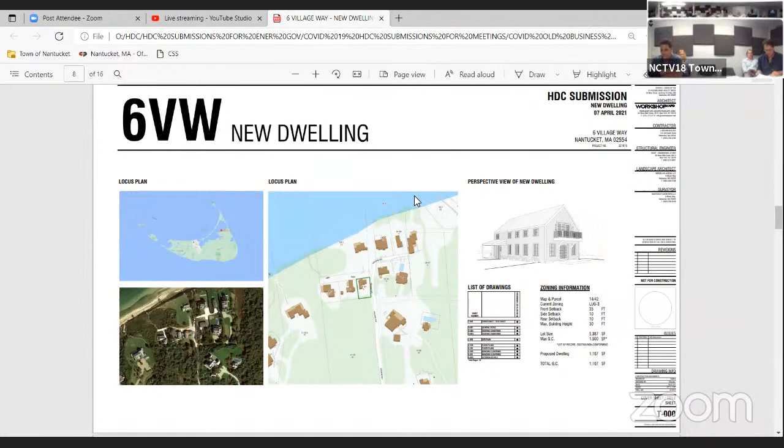Both the structure that was approved for demolition and the context that surrounds it. If you want to stay on that page, that's probably the most informative page to stay on. Just to refresh you all, this is a pre-existing non-conforming lot that has the ability to have up to 1,500 square feet of ground cover put onto it. We will need to go to the ZBA following HDC because it's a non-conforming condition. So the current structure on the site is approximately 1,200 square feet.

The proposed structure that we're putting on the site is virtually almost the same size, around 1,150 square feet. So as far as ground cover goes, we're not really changing the impact on the site very much, but we are pulling it back to the south so that it isn't as tight on the street as the current structure.

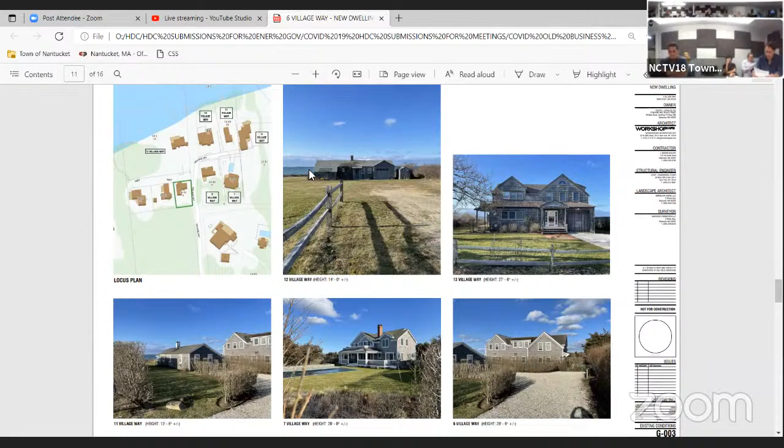When you go to the page with the site plan, you can see I've included the existing—next page, Ray, turn the other way, past the photos. You'll see how the current structure is only about 4 feet off the property line on the north side. The proposed structure, we're putting about 19 feet 7 inches back off the property line on the north, so we're trying to create a little more breathing room on the site.

Now, I've spent quite a bit of time studying the homes in this area. There's been a lot of demolition approved over the years, with some new houses built to the east of this, and some additions put on smaller cottages to the west of this.

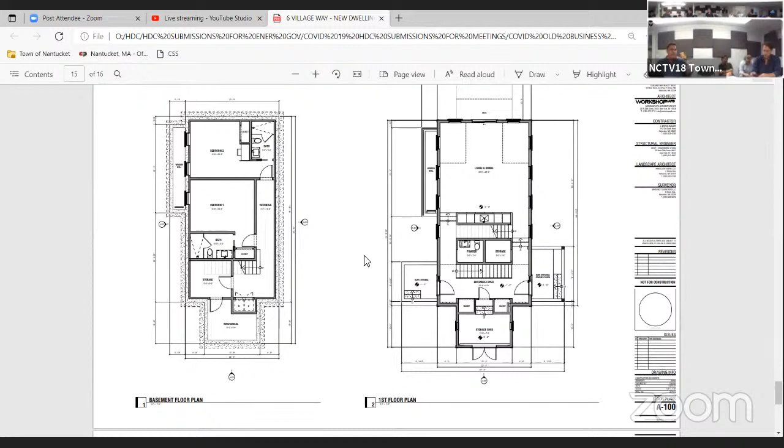Additionally, if you look at the existing photos of two of the more, I would say, older homes that still exist in the neighborhood, they're very simple boxes with long ridges on them. They're not broken up into a series of additive massing conditions. They're very just simple boxes.

So the approach we've taken is to do a simple box. It is a 1.5 story box to keep the ridge height down to 24 feet 10 inches. The ridge is about 44 feet long. And in addition to keep the height down, I've actually sunken the first floor plane down about 12 inches into the grade to minimize the vertical impact of the home. It's a gable forward elevation that would be partially visible from the water on the second floor.

I've tried to create more of almost a cottage look. It has a second floor deck cantilevering off of it that I think is quite simple and really somewhat appropriate for the area. Very simple rhythm of windows, nothing too drastic beyond the fact that it's a box.

I don't want to have dormers on it. I want the structure to be something that really almost looks like it was an old barn there that sort of got converted into a home, much like some of the smaller cottages that exist. I don't feel like one of the neighbors' houses next door, where they took a 1-story mass and stuck a huge 2-story mass on the back, is something that's really aesthetically appealing or something that suggests it would have been done back in the 40s or 50s when this area developed.

The trim on the project is gray, and that is what I have to say. Everything's gray — windows, doors, trim. Everything. Okay, great. Thank you.

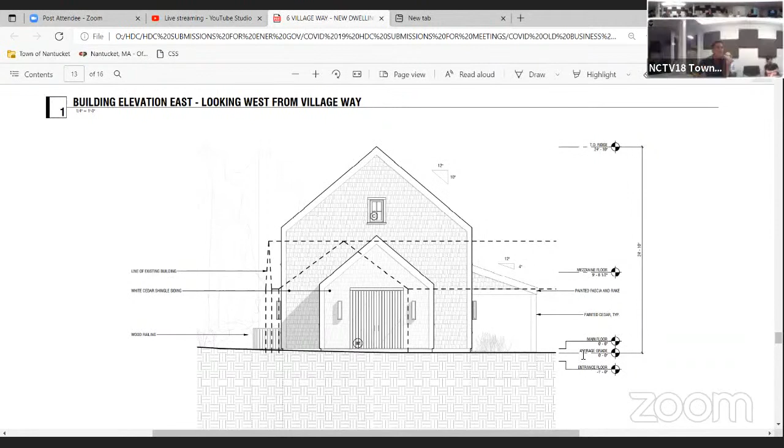Nothing. Nothing for the property? Landscape is nothing — it's going to be split rail fences and grass, that's it. There's nothing here. It's too small. I think she was talking about the building. Oh yeah, no, this is it, nothing else. Okay, I'm impressed, so that's all I got.

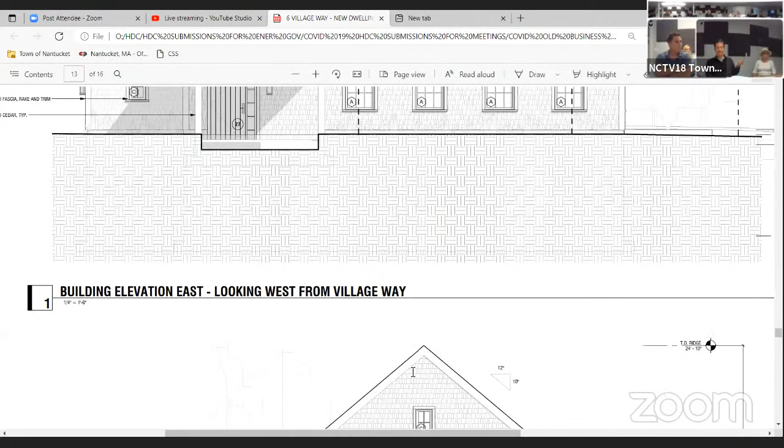Thank you. You want to go next? You want to go next, John? Abby's spoken. Yeah, go ahead, John. All right, my comments are that the changes are applicable to the area.

Okay, where is this, the front door? Which elevation are you looking at, John? No, the other side is the front door, but they're virtually the same — there are two entrances, one on the back, one on the front. That one's the front that has the porch on it.

There's not one double hung window in the whole project. That's right, John, there is not. It is very hard to use a modern glass, a 6-light or 9-light solid, without it being double hung. I think it makes a lot of difference to the neighborhood — it'll stand out. Maybe change it around for the area, go see what's there. I've been out there, so you ought to look into that. Okay, thank you, that it, John?

Thank you. How about you, Diane? I think that it is a good, simple building. What are the windows going to be if they're not double hung? Are they going to open, or what are they?

They will all be — I don't want to say all — a few of them will be awning windows that will open, as if it was a barn-like condition, tip out, not casement, tip out. The rest would be fixed, either fixed or tip out. We don't need to open all of them.

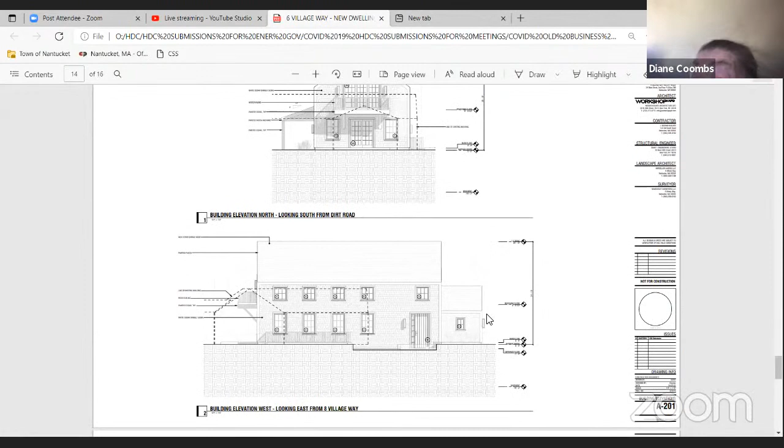Go on, Diane. I think in this particular location, they keep the front of the building simpler, and it's sort of tucked away. It is a different concept. I would try and see if anybody else is interested in keeping the windows as he designed them.

Oh okay, well it sounds like a lot of these windows are going to be fixed anyway. It'd be interesting to know which ones were. Thanks, Diane. Val? I do appreciate the simplicity. I went out there — there was just something about it that feels too big for this site.

I almost wish the smaller piece was on the corner as opposed to just the bigger facade with all that glass. Is there anything you can do to mitigate the impact of all those doors? There's like 5 doors on that side, right? I mean, I get why, but I didn't see anything similar to that.

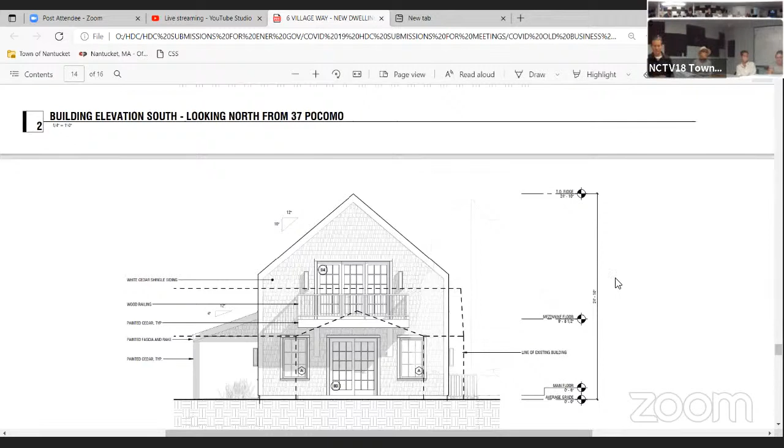South, yeah, north, the north. And it is a big roof right on the street.

Is that it? Okay, I appreciate the simplicity of the massing, definitely appreciate the gray trim. Because Andrew, you know I'm a little skeptical about that kind of rake that blends with the corner board thing. In gray, the building's extremely simple, so I'm willing to take a try on this one. So, to John's point, it'd be really nice to know which of these windows are operable.

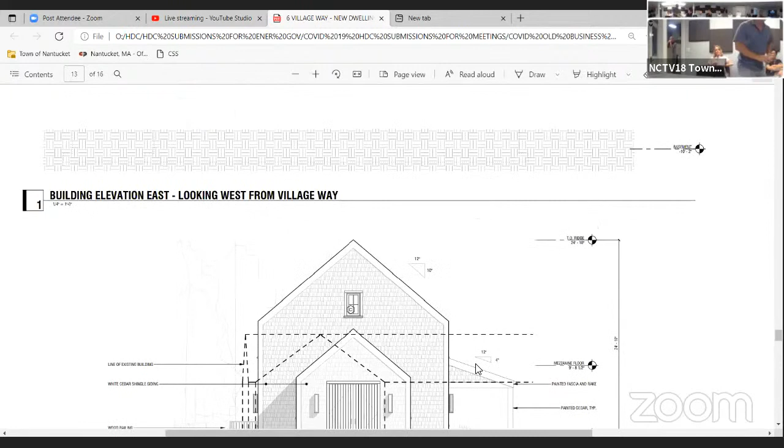Is that something you can identify? Yes, like every other one. There's no reason to make them all operable. They cost a lot more money, and ultimately a lot of people use air conditioning.

So these would be operable, and these would be fixed. That's it. But there's no visual difference in the unit, whether it's operable or not, except for the fact that when they're open, that's John's point, they're coming out off the face of the building.

Are these awnings then? They're all awnings. None of them would be casement, because that's not an appropriate look. Oh, I'm sorry, I misunderstood. So there's no casement windows, John. These are all awning windows, and half of them are fixed.

Okay, does somebody want to make a motion on this? We'll hold for revisions, motion. Really? Who's that? Well, what would he be revising?

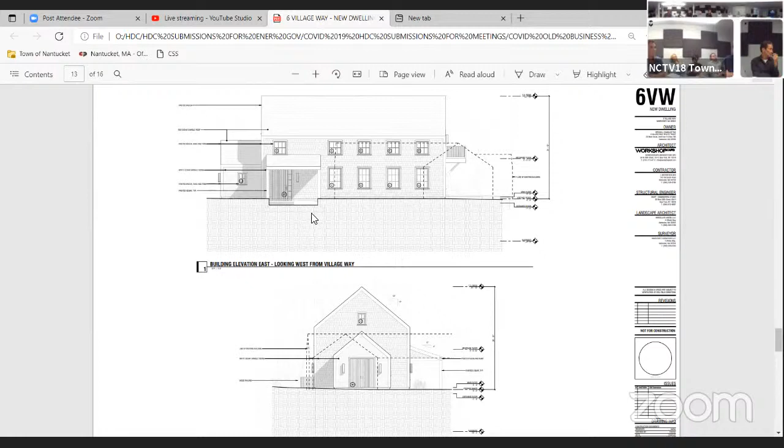Could staff just clarify the notes on the windows, what's operable? John has an issue with the windows. Val has an issue with the massing. Those seem to be it, and the glass thing, the amount of glass facing the corner.

Well, I'll add that above the second floor, in that area, everything is visible. Correct, everything on the first floor is totally visible too. All right, with those, we could make a motion for revisions, just those few revisions.

Yeah, see what we can do. Was that a motion for revisions, Abby? It was. Okay, on that motion... John? Well, no, I'm just thinking. John said aye. Diane? Oh, aye.

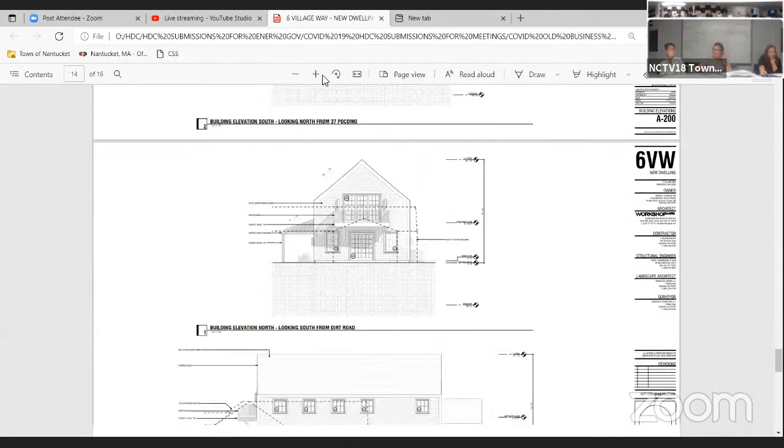I was gonna say, if it's something simple, like he could agree to diminish the glass on the south, make some of those windows instead of all doors, and make the windows facing the road double hung or look like double hung. What do you think, Andrew? Then you can get an approval. Yeah, we have to stop trying to...

So what if, rather than what I did on the second floor, I did a single door in the center with 2 large double hungs on the sides, and convert the other 2 on the ground floor to double hung. The north elevation would have a consistent look of double hung windows.

Let me make sure I understand. So on the second floor of the north elevation, we have 2 double hung windows and a single door? Is that what you're saying? Right, single door, 2 double hungs, and then 2 double hungs there. So the windows all tie in and you get a little more of this going on. Everybody understand?

Now, Diane can't see that image. So Diane, on the north elevation, what Andrew is proposing is that you have 1 French door in the middle, a single door flanked by 2 double hungs. And down on the first floor, you would have double hungs instead of the awning windows currently labeled as A windows. That's the proposal.

No double hung on the east side, no, because that's the most visible. I don't want to do that. Glass is light, how do you divide 9 light? You're gonna have 9 light and 6 over 6. I don't want to do that.

Okay, we have to get some kind of consensus here. Now, there was a motion to hold for revisions. That's on the table. I should be moving forward with that. Your motion still stands? It's standing by itself.

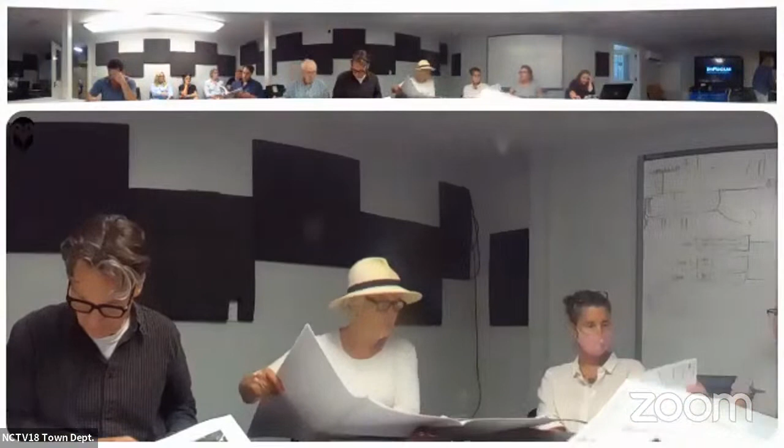I was thinking of proposing Tuesdays we get artichoke and black olive pizza delivered, so requisition part of our budget.

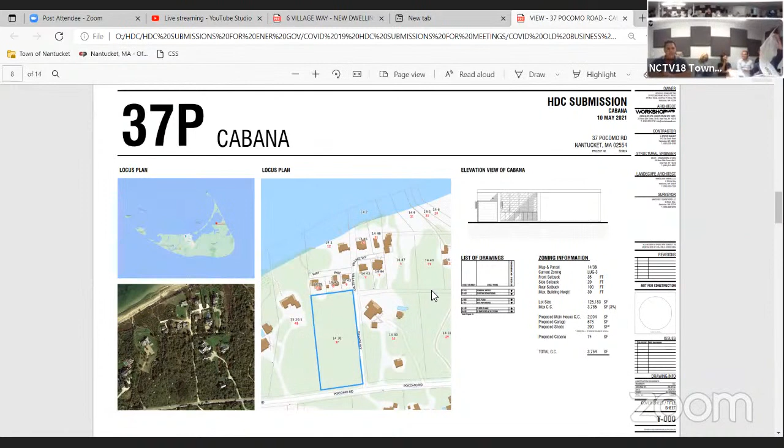So for the board, this is a house that was approved about 2 months ago as well. I believe Mirka was recently in front of you last week for the landscape plan here. And you had to take this fence down that was probably shown in our drawing, right here. So this is the cabana structure, which is essentially a large pergola that has an enclosed box in it with an outdoor shower and a powder room into it.

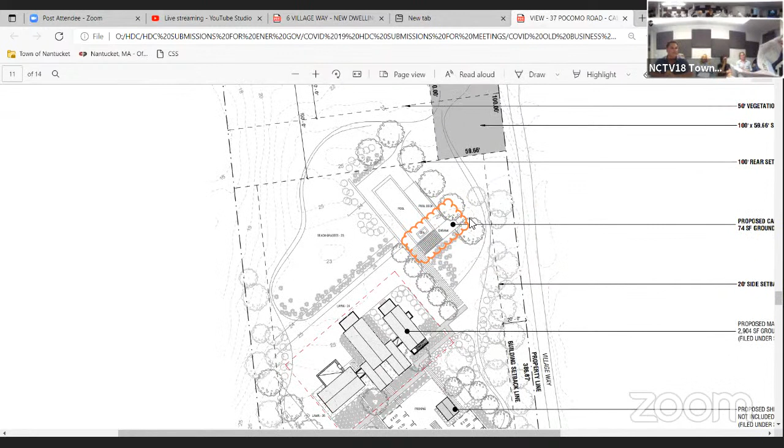And the intent is that it would be natural to weather on the outer frame of it, meaning the structure would be natural to weather, and the inset shiplap portions of it would be painted light gray. And we agreed when I was here with the house, based on vegetation and all the deals we brokered, that there will be no visibility of anything really on the ground floor of this property at all. So this will have zero visibility.

Because we're going to enclose this property very heavily with vegetation, as was discussed when you approved the house, and I believe was probably discussed with Mirka last week. So I don't believe there's any chance that any of this can be seen at all in any way.

And that is a masonry wall facing west, right? There is a masonry wall facing west, correct, which will have the same stone that was the pavers at the pool stacked up onto it.

All right, thanks. Who would care to begin on this one? I would. Oh, John? No, sir. What is this thing? These are lights. Yes, those are lights on the wall. What is on the outside material?

So that's white cedar. This is shiplap, John. Yeah, painted gray. The structure is all natural to the weather. The fencing is all natural to weather, all of this. And then the stone portion of it, I believe, was a granite, a medium gray granite. Because that's great too. Yeah.

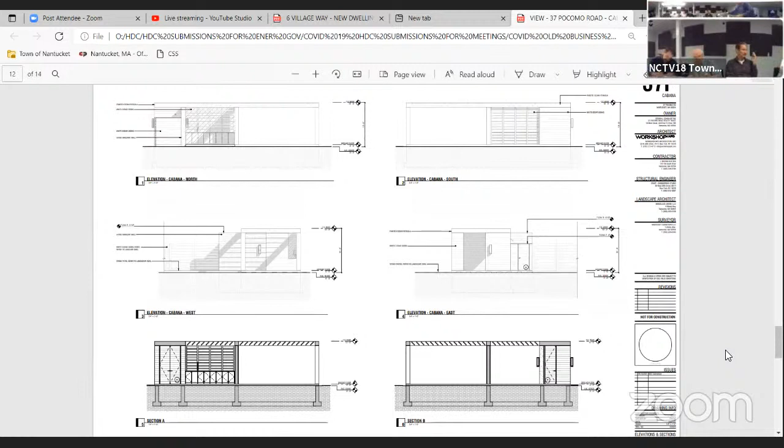Okay, sounds like we have liftoff. Can I have a motion? Motion to approve, subject to lack of visibility, not to be visible at time of inspection or thereafter. Okay, sounds good, that's Stephen's motion. On Stephen's motion: John, aye. Diane, aye. Abby, aye. Stephen, aye. Right, aye. Okay, there you go, and one more for you.

So this is another home in Canterbury Lane. Sorry. Oh, sorry, are you back? Yeah, okay.

This is another home in Canterbury Lane. This is the smallest of the homes that we've put in front of the board. This was the first house that was approved and built by my office in there about 2 years ago. It's quite simple, I think, a very Sconset-like structure. I'm sure the Sconset Advisory Board has comments that will trash it, but it's an asymmetrical gable, 2 stories on one side, 1 story on the other, 3 dormers, gable forward to the street. Again, it's already been approved and built there. So it's a fairly modest house for the size of the parcel compared to other homes that I've approved and others.

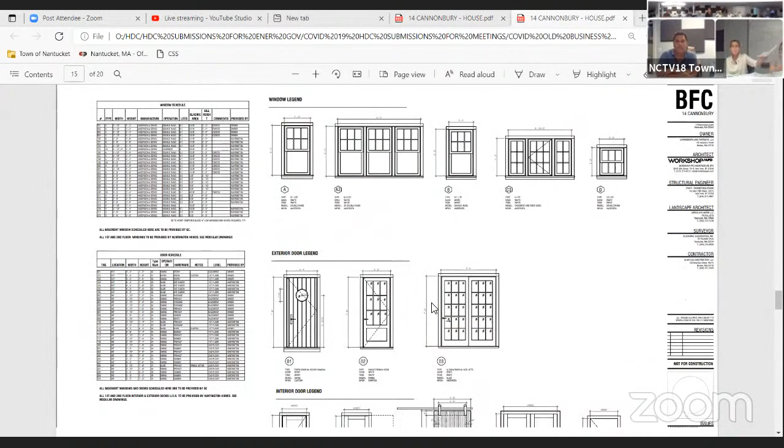You don't happen to have any photos of it, once you have? Yeah, is it built? Yeah, it's built. That would be helpful. You basically say that's it. Yeah, I believe I do, let me check. Maybe elevation, 1800.

That looks like natural weather to me. Oh, maybe it's natural, sorry. Okay, white trim.

No, there's 6 of them. I think this screen is dropped down a little bit or something. There's 6 of them, just like this, John. Yeah, the screen, it's 6 over 1 shot. Sorry, okay, so there it is.

You guys interested? That's what we're looking at now, with white trim. Anybody want - oh, Holly. Yes, Mr. Chair, Sconset Advisor took a look at this on May 17th. Very minor concerns - they actually recognized that this was a structure already done up there.

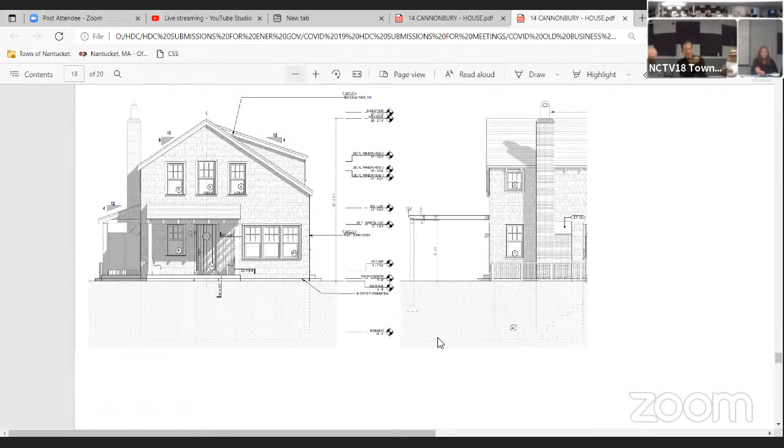Holly, north elevation, bring the shed roof down off the ridge. They're not on the ridge currently. Yeah, that's what they indicate. I see that - name, definitely not at least a foot down from the ridge there. I think, yes, make it lower off the ridge - lower than what's proposed is the suggestion.

And that would be the other tough one, because it's a 4 and 12 right now. Yeah, you'd have to drop the pitch to below 4 and 12. Thank you, Holly. Board members.

Except for the chimney being painted white, I think it's fine. Oh, good catch, yes, for sure.

How about you, John? Question - where the air conditioning? Are these air conditioners? You fell asleep. Andrew, are you drifting off over there? Me, no, I'm looking on the site plan if I can see where they are. Well, he's pointing to the north elevation - there's something silhouetted behind a porch that kind of looks like an air conditioning unit to me.

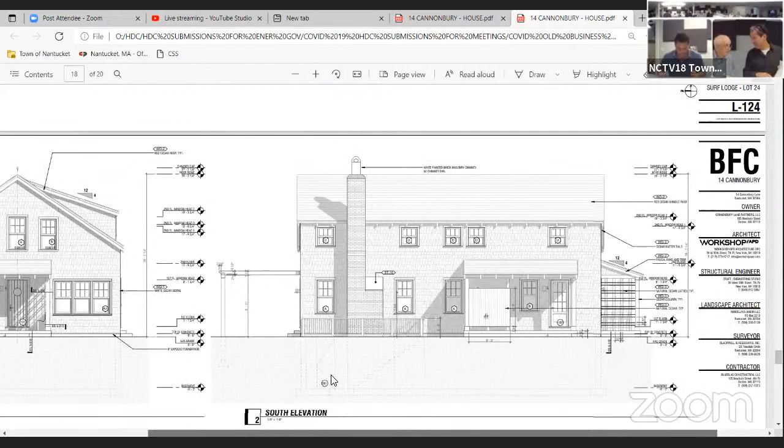No, it's a bench. Oh, it's a bench, not air conditioning. It's a bench. Okay, that's a bench. Yeah, I'm not putting an air conditioning bench. No, look, so you can see it on the north, on the east - do you know where the AC is going, or is that Mirka had it on the landscape plan? Yeah, put it on Mirka with the landscape.

Yeah, so we'll be looking at a landscape plan, but that is not the air conditioning, John. Okay? That's not being approved today. The air conditioning units are not being approved today, correct? Thank you, all right, good.

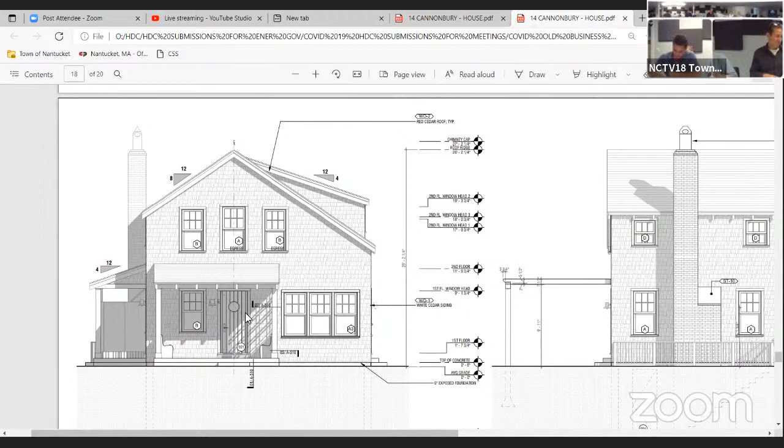Diane? I think that the dormers on either the east or the west - I've only got the front of the building up right now. I'd like to see the rest. The south elevation, those dormers perhaps could come in a small amount - there's a lot of cheek on either side. Diane? Yes. There are no dormers on the south elevation.

No, what is it? Is it the north elevation that's got the 3 dormers? Yeah, the north elevation has 3 dormers. Okay, but I would like - maybe, Diane - to bring them in a little bit. They have a lot of room in the dormers. Either that, or I don't know how you could make the windows bigger.

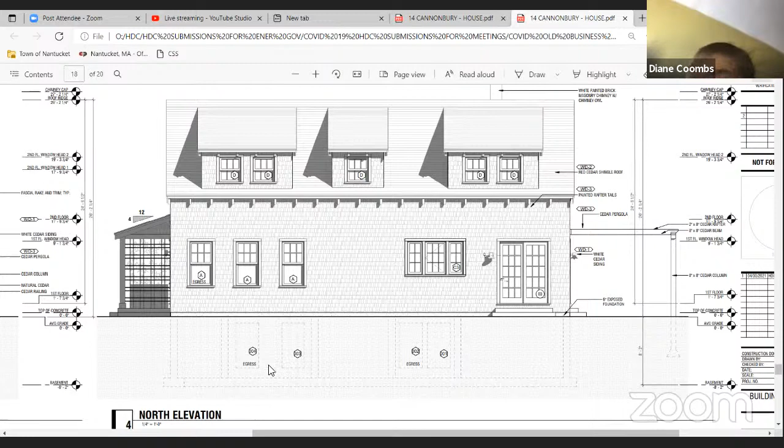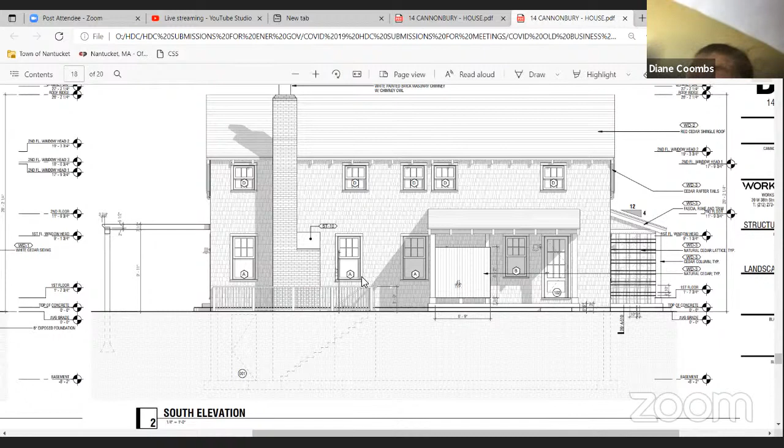I think on the second floor, second story, perhaps the south elevation, those small windows - the D windows - should be made bigger. Those windows right there in that elevation, I would like to see them a little bigger. The A's are a nice size, but those D's are little. I think I would like to see them made bigger, so to go up at least one more size.

That's true on all of that second floor - all of them are small, except that window they're saying the A should become a B on the east elevation. I think that is probably true - it would make more sense.

Okay, thanks Diane. Val, did I get your comment? It was about the white chimney color. Right, it's going already from built once, I mean.

Abby, I was wondering if the chimney couldn't be internalized. No, it's not a very big house, it takes up a lot of room. It just looks a little bit like an afterthought, but that looks a little Sconset-y too.

The quirkiness of it, that's what we try to do. I think it's stepped, totally appropriate. The chimney is brick, natural brick, intended? Okay, that will make it, I'm fine with it.

It's gonna go natural, just regular unpainted brick. I thought you were going white, but all right, fine. So I'm okay with this, with the chimney being natural as opposed to white.

Would somebody want to make a motion on this? I will. Okay, go ahead, John. I can't see any instance where the change would help it. So I would suggest it's approvable.

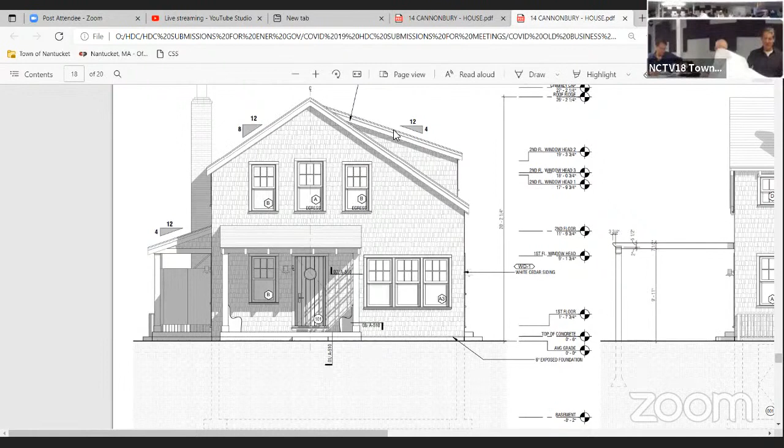There you go, Andrew, thank you. The next application is for a shed, a basic shed. Nice try, Andrew, this is somebody else. There's no shed on that side. Thank you all, delightful seeing you in person. Thanks for coming all the way up from South Carolina. I'm here now, I'm here for 2 months now. He's gotta live in his own house that he built, remember?

Okay, so now we're gonna do a Zoom performance, right, with your cut? Yep, it's Adam Davis from Goldsmith Architects here. Want to sit on this? I'm taking turns with you guys today. Carrie's gonna sit on this. Yeah, that's great. You guys are gonna get to take turns with me in a minute. Nobody wants that.

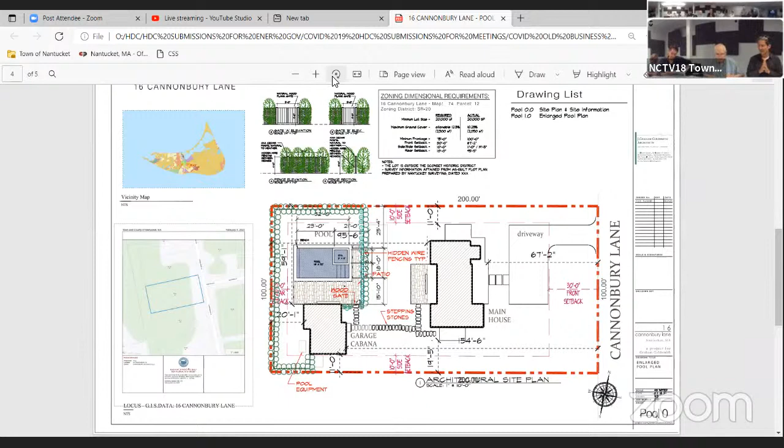Not a shed, okay, this is large. We're all looking at our drawings here, and Carrie's on your board, Val's stepping out for a second, the rest of the main regular board. Sorry, you wanna start?

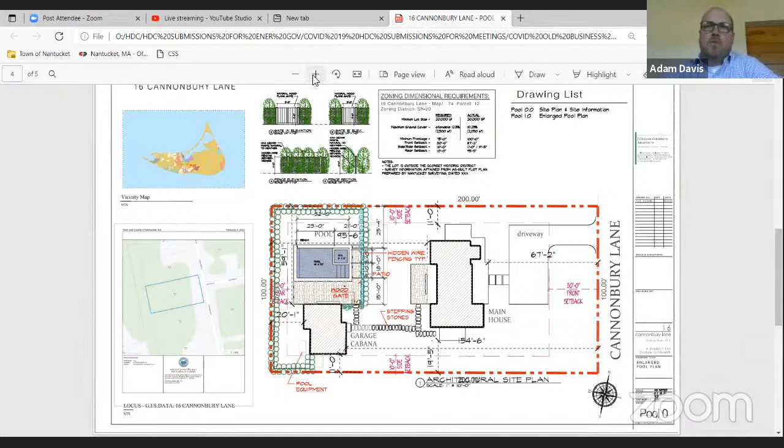Sure, so this is Adam Davis with Goldsmith Architects. This is a property right next to the one you just reviewed, and this is the house that was being moved from 9 Hawk Circle, the house and garage, which actually just arrived on site I believe on Monday. So this application is simply for a pool down on the western side, the backyard, with a bluestone patio surrounding it, and a small deer fence with privet hedge on both sides.

That's it? That's it, it's pretty straightforward, not a complete landscape. No Sconset on this, right? Sconset did review it on May 17th. They had no real concerns, only notated that the pool seemed close to the back property line. The back property line is public property, or it's that open space area back there. So it's a trust property which is likely to go to conservation. Yes, okay.

Anybody want to start on this one? I'll start. Thank you, Carrie. I appreciate that there's not a ton of hardscaping around it. I think it's consistent with the cottage, stepped away from the house and hidden by the house from the road. I think it's fine. Okay, thank you. Abby, you ready? Yeah, hold it up, I'm okay with that. Abby's fine. How about you, Diane?

You there, Diane? I'd like to see something else used than privet in the fencing, because the privet will be visible through it in the wintertime. I'd like to see more natural vegetation used, not quite such a formal square.

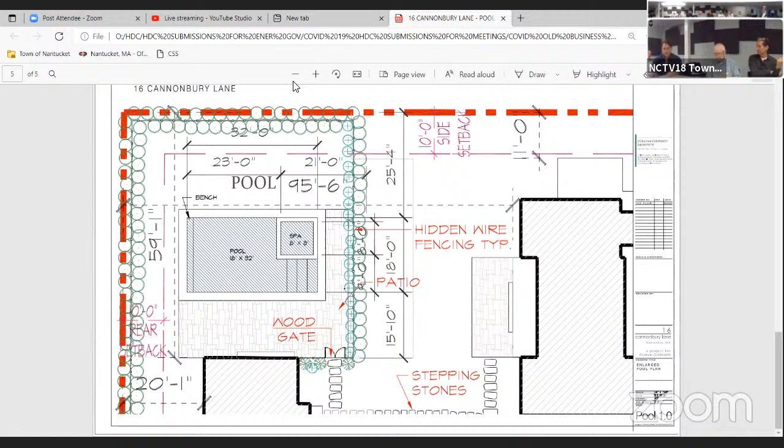Somebody like to make a motion on this? I would, oh John's gonna make a motion, to approve it. Just where is it located with the road? Oh, the road's over there. This here is, yeah, this is Cannonbury right here. Okay, got it. I'll make a motion.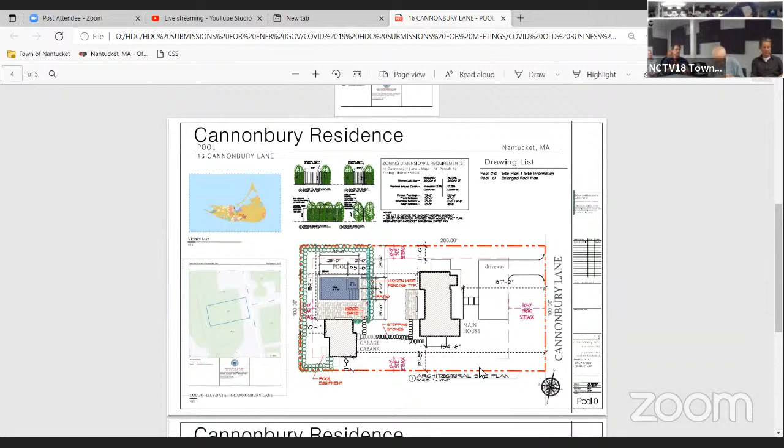Okay, to approve? John's made a motion to approve, folks. On that motion, Abby? Aye. Carrie? Aye. Thank you, Diane. John? Aye. In favor, motion carries, 4 in favor, 1 opposed. Thank you, Adam.

All right, thank you very much. Nice to see everybody. So we have Matt up at 28 Main, Sconset.

Yes, Mr. Chair, so this is the garage that you all approved. The concerns from Sconset, they took a look at it on May 17th. Cupola not in keeping with the neighborhood, top heavy and too large, unnecessary. Bracket details in the pergola over the side door seem heavy as well, but could work if incorporated in a more delicate design. Those are the comments, Mr. Chair. Okay, thanks.

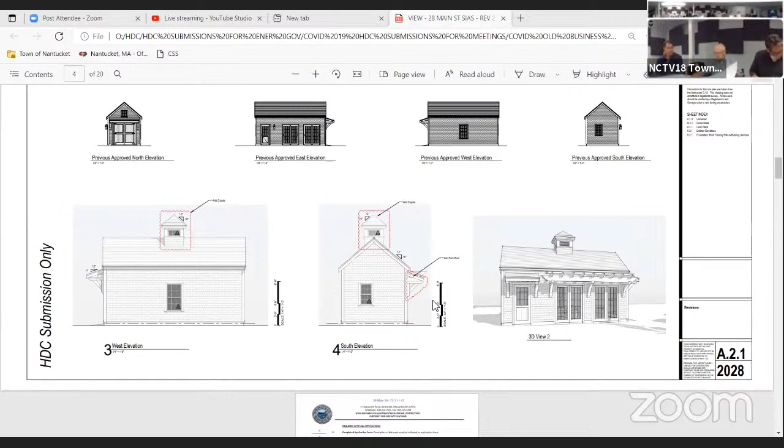Okay, so prefer natural pergola and no cupola. Abby? I like the previous, it's so simple. It's like such a simple barn, and now all the beams going across the pergola have detailed Chinese-style joinery, or whatever it's called. I like the simpler version. No to the cupola, I think it's just too much.

Thank you. Diane? I would like to see the brackets holding up the pergola a little less bulky. They seem to be very wide to carry that pergola up on top. I'd like to see them perhaps less deep, whatever. It looks like the ones on the east elevation come down longer than the one on the right for the little roof.

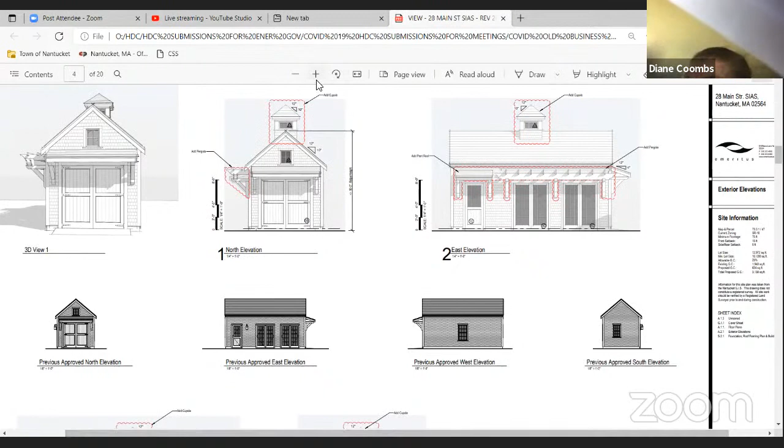And the cupola, I don't know what you've decided. I think it's not appropriate with the building.

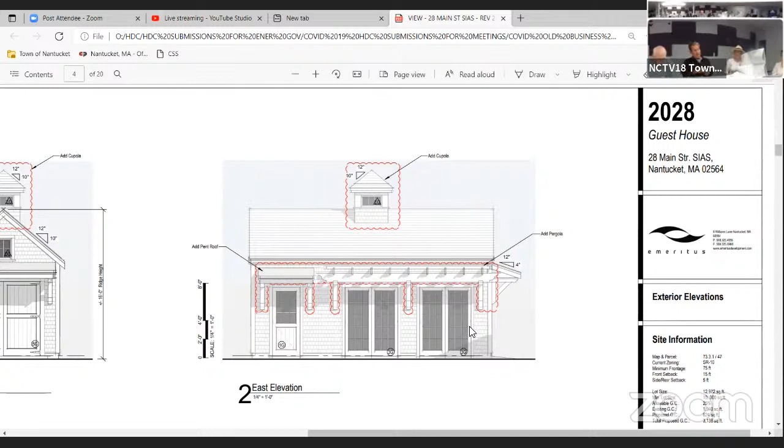Okay, thanks, Diane. John? The comment on this, the visibility, from what I can see, outside of the property in the back, the little shed, the only thing that would be visible, possibly, is the cupola.

Cupola should disappear, not break to reflect, take a hike. Take a hike. Okay, take a hike, that's right, taking a hike. Also the door, if it is visible.

Actually, South elevation. John, I don't think that he's proposing changing the door, right? Probably down here, the little drawings are what was approved. Okay, so thank you, John.

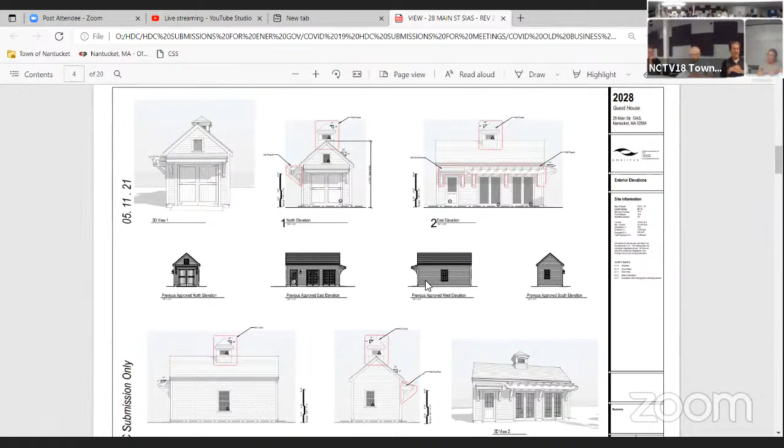The cupola is not getting a lot of favor. So I also believe that the pergola, because of its size, is very small, but the members are very large. It's kind of like if this were twice as big, three times as big, it would be successful, but the fact that it's so small makes those pieces feel really large, so I'd like to see all that stuff scaled down and simplified.

Could I shrink it to like 4x4 stock as opposed to the 6x6? Yeah, that would be, well, you get my vote on that. And natural to weather.

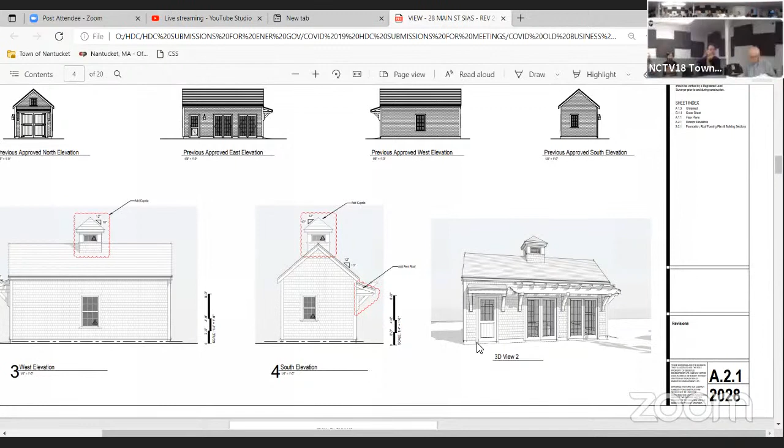It is, it's not, yeah, I don't think we specified, but if we could just... I think we could do more staff with this, the cupola and smaller members for the pergola. Just leave it alone. I'd actually like to see that beam go away. I think that you could make that steel and box it in. This could just be half the size, and that could just be boxed in wood.

It's very ornamental, the beam, that's holding up the rafters.

The biggest concern I have is not necessarily the two-dimensional aspect, but if you look at the north elevation, that's a buildup. That buildup is for such a small pergola, the depth of it. If this were 8 to 9 feet deep, I think it would be more relatable.

I still think it would be too ornamental for this structure. But I think you could have that element if you were to downsize it. One way you might do that is to use steel and box it. I bet you could go to a 4x6.

Yeah, now that I'm looking at it, it's such a light structure, I could go to a 4x6. Yeah, 4x6 beam. Does somebody want to try a motion on this?

Steve, make the motion. Well, you've got Steve's not... actually on. Yes, I am. All right. No, I thought Val was taking turns. No, well, so Val is, you're next. Oh, I misunderstood, she comes back every other one. Triangulated, that's the way it's happening right now. Strike my comments from the record. Well, I think they were good comments.

You want to give it a try? You want me to say what it's gonna be? No cupola, through staff. And the brackets would go to 4x4s, and the carrying beam would go to a 4x6, natural to weather, on the pergola piece.

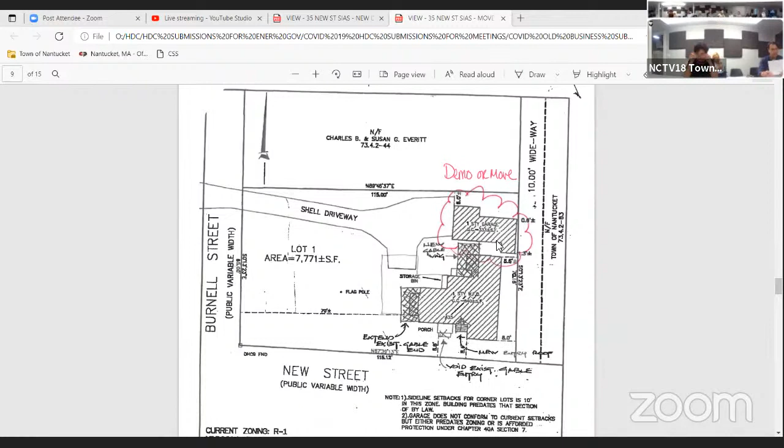Hello, Lisa. Oh, hi, Diane. So this, I don't know if this is the demo/move. It's an existing building on the corner of Burnell Street and New Street. It's a small one-story cottage that I believe Chris Holland actually built in 2004. So that's the first part of the application. The second part is basically to replicate the building in a slightly larger scale, but a very similar design.

So our first thing is move off or demo the building. Shall we do that first? Yes.

Okay, so you've just explained it, Abby. I think I'm fine with it. Okay, Madam Chair, just for the record, Sconset Advisory did take a look at it on May 17th. They had no concerns. All right, thank you.

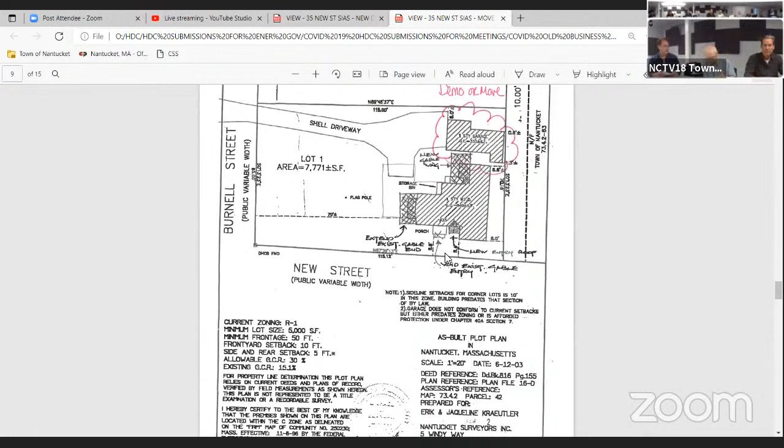So if I could get a motion to demo or remove. Madam Chair, I know you didn't forget about me. No, I thought I got Johnny, Val, Abby, Carrie, and me. That's 5. No, no, no, Carrie, Carrie. Even, I really want you on that. That's not 5. Carrie's not on it. Oh, Steve is on. Steve, it doesn't say on mine, so I thought she was on it.

Steve, what is your view? I'm fine with it, emphasis on the move, but I'm fine with it. All right, so could I get a motion to move or demo, please? No, Tina Hoskins? Motion to approve. Thank you, move to demo, all righty.

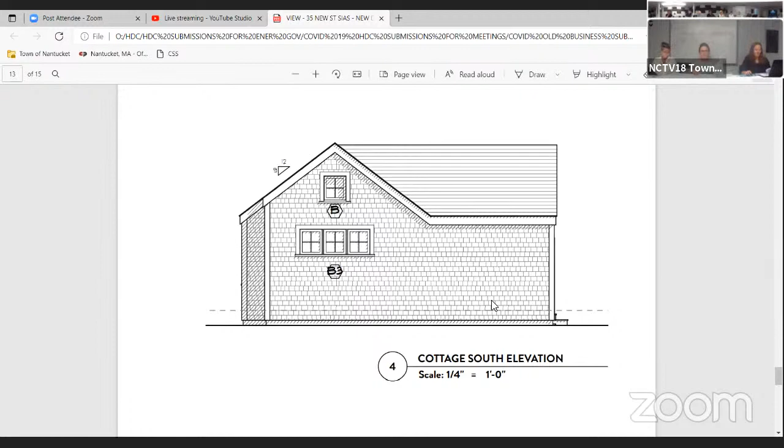Madam Chair, Sconset Advisory did take a look at it. They had no really substantive comments on it. There was just one notation about the south elevation, where there's a lack of fenestration on the right-hand side, but it reads as a shed and is reminiscent of the previous structure that was once there. So that was good. We did have a comment about photos of the street that weren't included in the application. Other than that, no comments, Madam Chair.

Oh, I think that photo was to show the hedges.

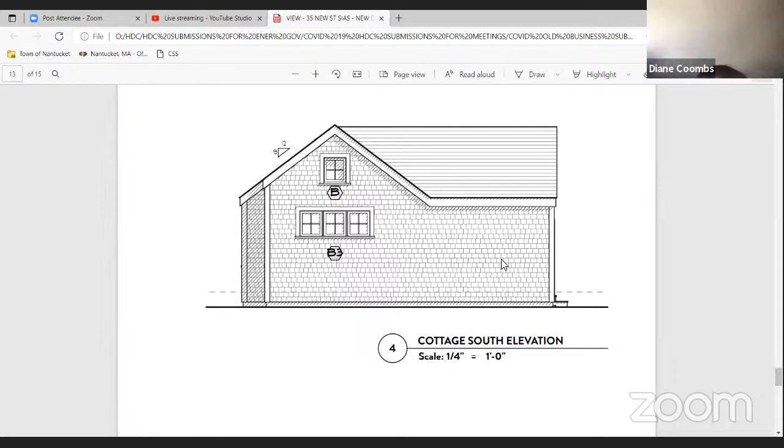Stephen, I think Carrie's on this one. I'm fine with it if I'm on it. I said it's a charming structure, Madam Chair.

Thank you. Johnny, north elevation, south elevation, and east elevation - 1, 2, 3, 4, 5, 6. There's 6.

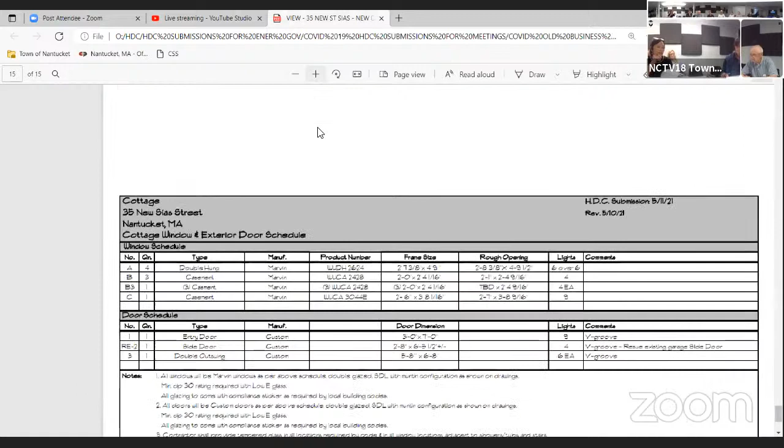They're listed as casements. They can become awnings. Do they flip out, or what do they do? Some would be fixed, but if you prefer, they could become awnings where they pop out. They're in the visible area, that's what I was trying to say, and they're highly visible. The other one here, C, on the north elevation, is a C window.

And what does that do? That one would end up being fixed - couldn't it match all the other double hungs? Because there's a sink in front of it, a vanity. The window needs to be shorter.

That was the reason. Are those casements like on the oldest house here? This one is visible, but I could make it a fixed unit. It should be made a double hung to match the others - it looks odd in there. So it would have to be a 3/6 double hung.

John, it would have to be a 3/6 weighted double hung if it were changed, which is fine. I'm okay with that - that was my question, could it convert to match the rest of them? You can't match them exactly, but it could become a 3 lights over 6 light double hung, a weighted double hung. Do you guys know what I'm talking about? Yeah, it's like a cottage window. They're not even, but that's fine. That was just my question on it - it looks odd compared to the rest of them.

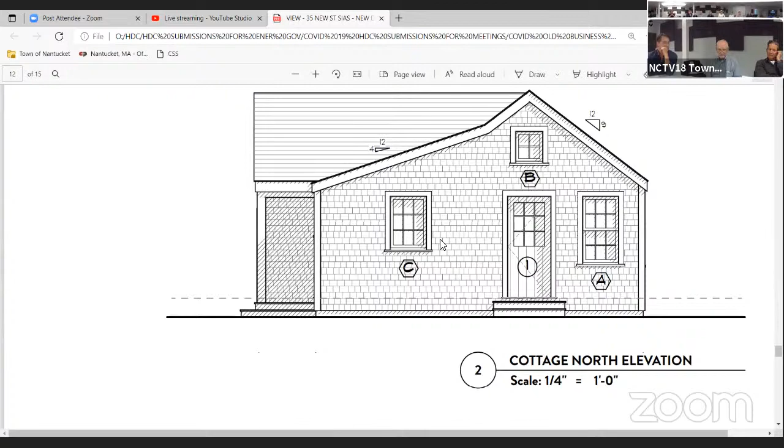Is that the side we're going to see? Well, it's in the driveway. Oh yeah, so I'm happy.

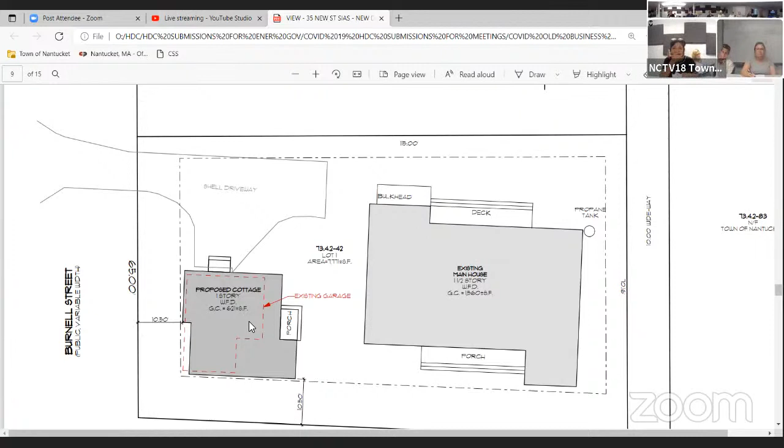What do we want to do - hold it for revisions on the windows? No, get rid of it. Through staff, what would you like the motion to be? I would like to make a motion to approve, making the C window on the north elevation a 3/6 - is it 3/6? Yes, 3/6 working window.

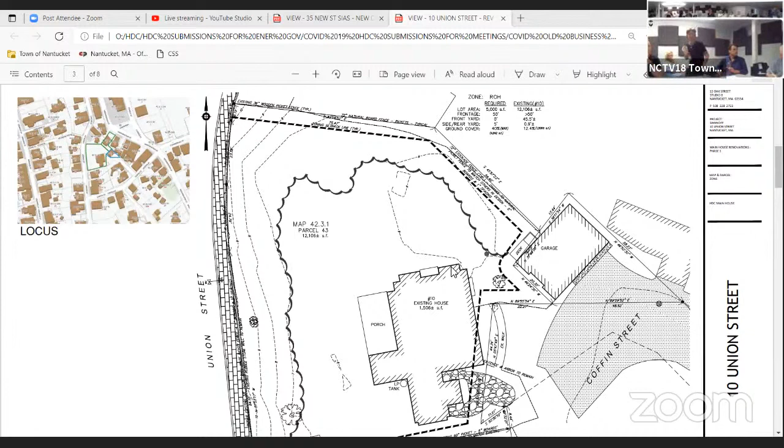And before you flip through the pages, I just want to say - I'll come back if I get there - I've revised what you're looking at based on HSAB's comments, so what you're looking at will be revised. I have some revised drawings with me that I thought might help. Okay, what we're looking at here is pre-HSAB or post-HSAB? Pre-HSAB. Pre, okay, all right.

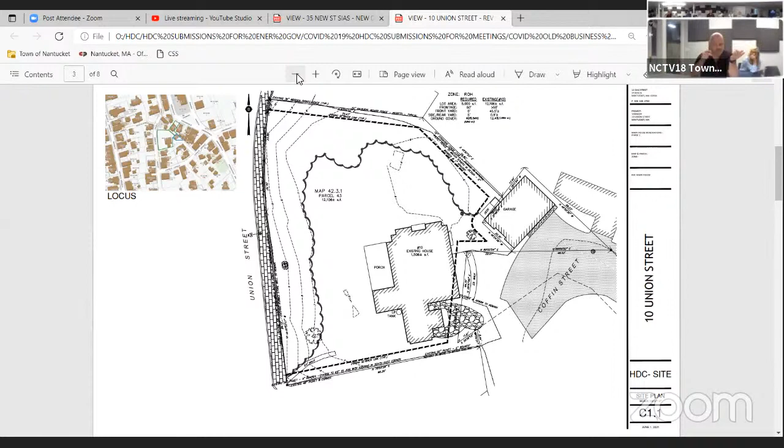So, is there anything you want to say about it? Yeah, there is. This is a proposal to add some French doors in place of some casements on the side yard on the north elevation. On the north elevation flanking the chimney are two existing bays that have 3 casements in them, bottom left. Got it. And we proposed originally to put French doors there to match the French doors on the east elevation.

And so HSAB, there was some discussion about - by the way, those bays are not original, the building's from the 1920s, those bays were added. I think Angus remembered working on them, actually, Design Associates. So they're not original to the house, but the proportions of those casements were talked about, and one of the suggestions that gained some traction was to take the proportions of the casements and turn them into French doors with a panel below.

So I did make that change. I'm not expecting this to get approved at the table, but we went ahead and changed the other French door that was kind of a typical 15-light door, which really didn't have the character that this building warranted. So the proposal would be to make all the doors match, using the proportions of those casements as the inspiration for it.

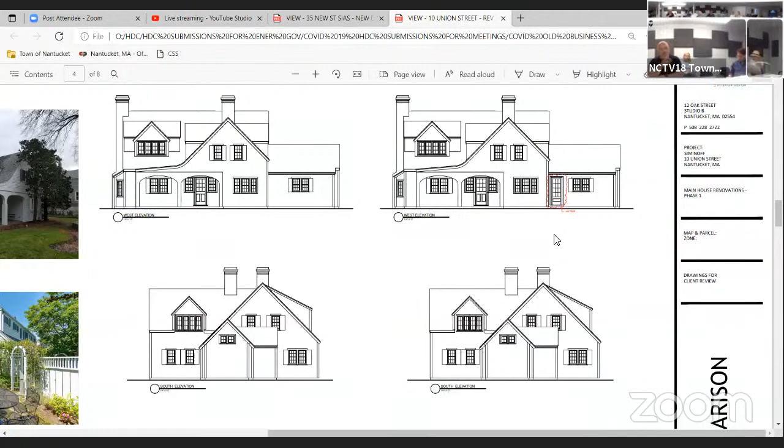You can pass an extra one there if you want to pass it to Val. So, sorry, did you just say you were going to reuse those windows on either side of the chimney? No, we redesigned the French doors we had proposed based on the proportions of those casements, and I just provided a drawing of what - okay, so that's in response to HSAB.

Thank you, Joe. Just - yes, we know what HSAB is going to say, but let's just say it. Yes, so you've all seen this structure before, 1920s, 1930s, and you looked at it on Monday. The small sheds on either side of the fireplace read as bays, and having French doors in a bay is awkward. Perhaps 3 narrow doors with a lower panel to give the appearance of tall casements, and then an option to recess the French doors in the existing bays.

With still glass at top and a panel below was the comment. I did also mention that this elevation is possibly visible from Union Street. Definitely, especially in the current condition, but Joe mentioned there'll be a landscaping plan coming in at some point. I actually like it open. Somebody was grousing to me about losing all the landscape, but now we get to see what a great house that is. Oh yeah, that's why they bought the property. Oh, so Max doesn't have it anymore? No, okay. A new owner, and they had another small house in town which they sold, so it'll be their family house. A great house, fabulous house.

Okay folks, well, I liked what HSAB had to say and wanted to take the initiative to draw it and actually change the standard 15-light door that was already there in response to their comments. The one comment about the recess, which Angus mentioned at the beginning of the meeting, was that because it's a bay, it feels a little weird with French doors, but then they said if those doors were long and skinny, they could all open, and that would be fine with them. Angus thought one option was to push the doors back so they're at the same plane as the gable, turning those little spaces into mini porches.

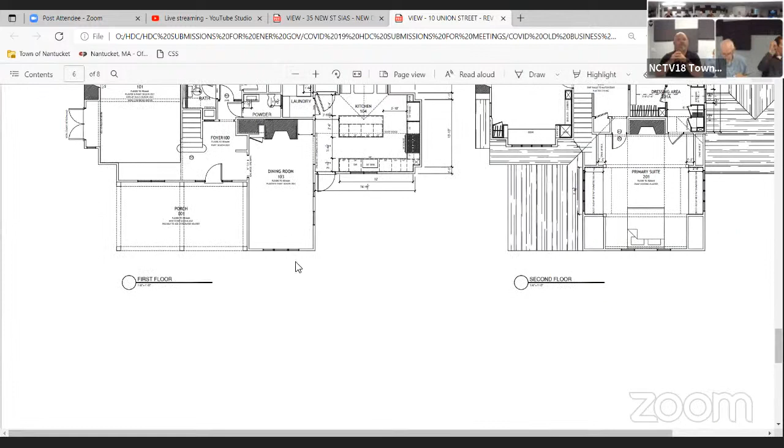Well, you want to start, Abby? Yeah, I think it should stay the same. I think it's charming with the windows there with the shutters on either side of the fireplace with the little bays. I think it's charming the way it is.

Well, I don't disagree with that. But the shutters don't really work proportionally, because there's only 2 shutters, but 3 windows. Val?

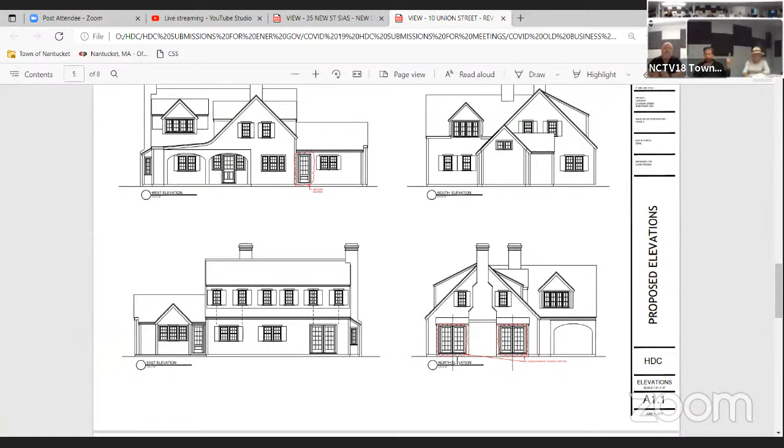I like the proposal that he's giving us today to make them all match, in terms of pane size. I'm still uncertain about the north. I'm pondering it.

Okay, you want me to come back? Sure. All right, Diane? I like the narrower windows by the chimney. The shutters don't follow unless they're fold-over shutters on both the east and west elevation. You've got mulled windows with only shutters at either end. They perhaps should take them off, or make them the double shutter that unhinges. But other than that, I wouldn't do anything else to it.

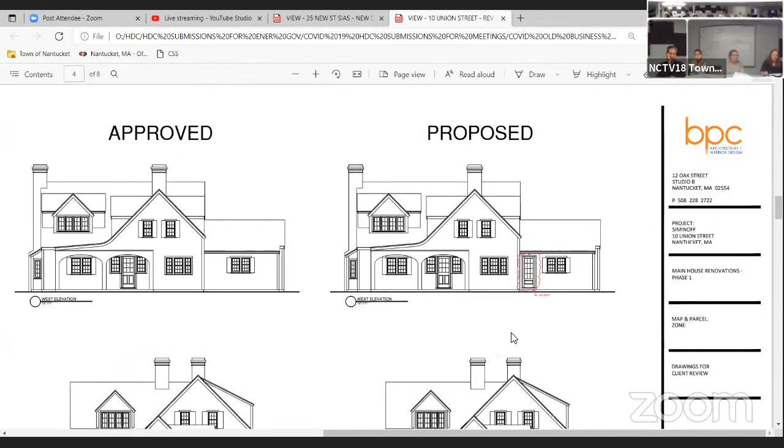The shutters are existing. Change is what you see here on the north elevation. Yep, and then you see here on the west elevation. Those are the only proposed changes, making that a 12 light door. I guess three times 4 would be 12. So I'm fine with that.

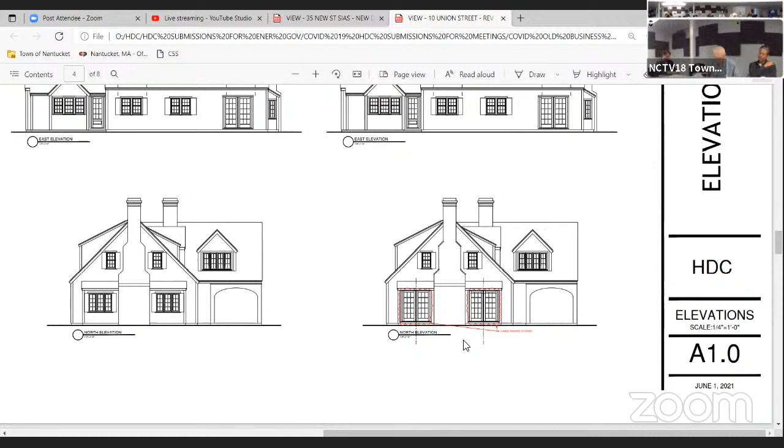Okay, thank you, Diane. John? East elevation, no changes to these. Well, I'm looking at the French door down there, multi-pane door. I can't see if it's existing or not. It is, all of that's existing, no change there.

So John, the only thing they're changing is right now, see these windows? He wants to put French doors in. That's what he's asking, right, he's having the one up here. Yes. And frankly, I really don't want to get an approval for what I submitted, but what I redrew in response to HSAB, I like better. I'm sorry to say that.

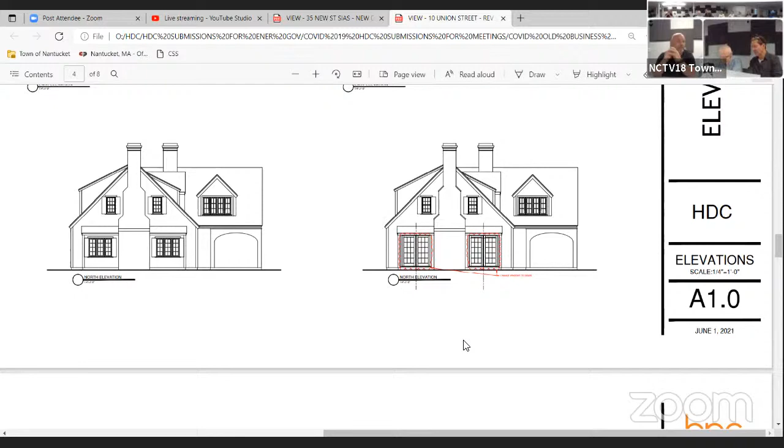He's putting panels underneath this, making 3 doors instead of 2, and he's putting panels underneath. That's to make them look more like the existing windows. Okay, thank you, I think it's approvable. I actually think it's really handsome, I should say the revised version, and I'm okay with changing that additional door.

So, oh, and then Val, you hadn't quite finished. No, I'm okay with it because I do believe they're gonna screen it like it used to be. So I'm gonna call this Exhibit A, the revised post-HSAB drawing. Okay, that's good, Diane. Yes, this is Exhibit A.

Are you making a motion? I will. Motion to approve through staff per Exhibit A. And Diane, I'm not sure that you're privy to Exhibit A, but that was Joe's - he changed the double doors to triple thinner doors with a kick panel on the bottom to make it more like the windows. That's what that looks like. So that was Val's motion.

On the motion, Abby? Aye. Diane? Aye. Thank you. John? Yeah, I have a question here. Before you move to motion. Well, I did already. I'm looking ahead at this window here, it's like, yeah, apparently.

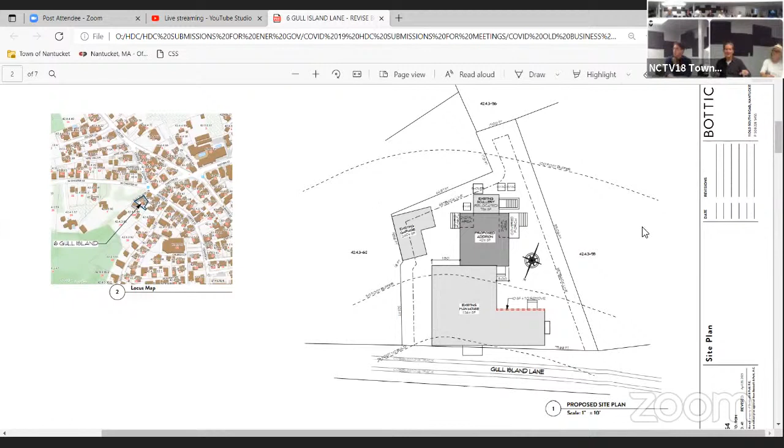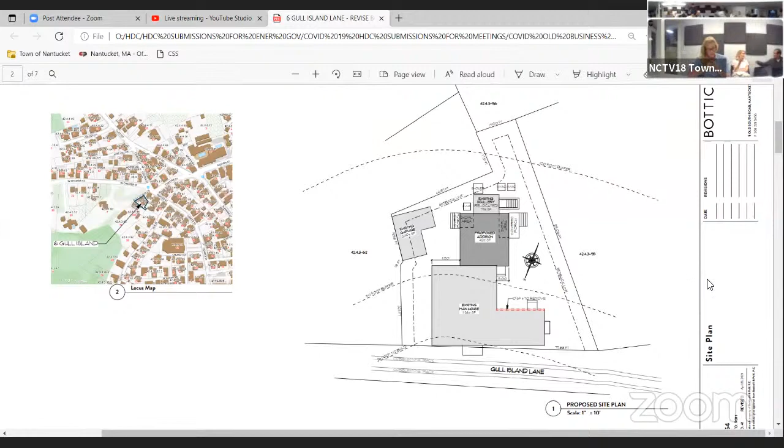Partly why we had to come back is that in going through for the foundation issues, we realized we needed to remeasure the house and found discrepancies with the old plan we were working on. The house itself is shrinking by about 100 square feet on the existing structure, and I'm requesting to shrink one of the side Ls by 6 inches. The reason is, you previously approved demolition of both the rear L and side L. The side L, which is single story facing Gull Island, when we take it down and rebuild it, I wanted to pull that side and the rear back so it didn't compete with the original dining room window, allowing a gutter on the fascia so the water gets dealt with better. That's the rationale for the dimensional changes.

The grade is existing, it doesn't change - we just factored in what the grade would be and how much of the foundation would be visible. Where it says brick veneer, that's actually old brick that was on site that we've reused, not stick-on brick, the original brick. It will have lime mortar, very tight joints, and will run from the foundation's footing up to the sill.

As we work our way around, I'm requesting to eliminate the 2 windows on the gable end of the right L addition next to the fireplace chimney. What side is that? I'm looking at the proposed west elevation - A-2-1.

Did you say why you were taking out the windows on either side of the fireplace? It's a really small room, and I've got a lot of windows on both sides, and it faces my neighbor's property, so there's not a lot of space in between the two. I'd like to have bookshelves on the inside, and since there were already a lot of windows in that small space, I didn't need the 2 windows on the end. They were previously 9/9, but not original - the whole structure was built in the 50s.

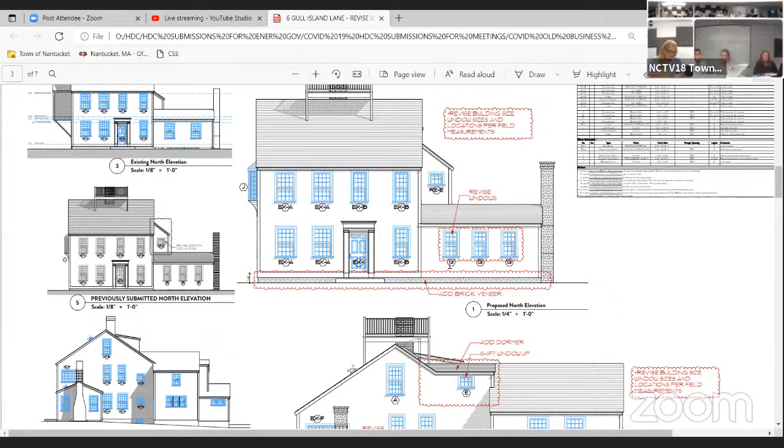In holding that 9/9 up, because of where this fascia falls on the house, we matched what was existing exactly. But that 9/9 was too tall for that space, and I couldn't keep the same sill height—dropping it would look funny. So I shrunk those to the cottage 6/9. You probably won't notice it as much since the window still sits sort of underneath the soffit a bit, but it is a change from what was previously approved.

Going to A-2-2, looking at the proposed south elevation, I'm requesting a revision. Originally it was a 6/6 window on that 1950s addition. I would like a 6-light window instead. That's actually in a bathroom, on the very back of the house on this proposed south elevation.

It's on the interior wall of that 1-story L—you almost can't see it, on the other side of that porch. It's tiny; it's marked E as a revised window. It was a previous 6/6 window, and I'm asking for it to be a fixed 6-light window, or an awning 6-light window.

You can sort of see that new dormer to accommodate the 6-light window in the 3rd floor stair. You can also see the revised bulkhead stair coming down on this side of the porch, and the porch stairs added on both the west side and going around to the east side where it says 'add steps.'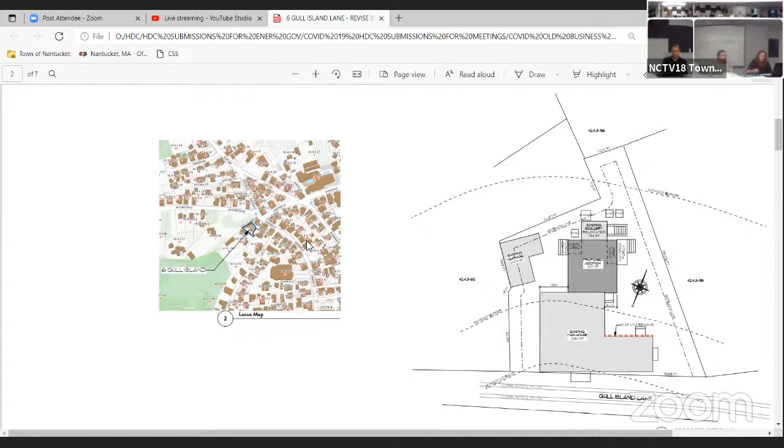ESAB took a look at this on May 24th for these proposed alterations. There may have been a little confusion on their end, but they indicated the combination of existing additions on the back of the house tells a story of its age and the transitions through generations of owners. It is a shame to lose that sense of character, but I'll add my own note to that.

The main part of the body of the structure is still intact, and the proposed additions are going to replace those previous additions. The previous additions were small in scale and somewhat quirky, while the new rear addition is of considerably different scale and character. I will say this is better than what was previously proposed at one other time. Proposed additions should be broken up to reflect the existing scale of the existing rear additions.

On the west elevation, the dormer doesn't work—it should be removed to retain the original roof line. I don't necessarily agree with that, because I understand the intention of wanting to retain that beam. The addition itself is not clad and does not represent a previously approved massing. I do agree with their comment that the revisions were not clear at all. But overall, those are their comments, Madam Chair.

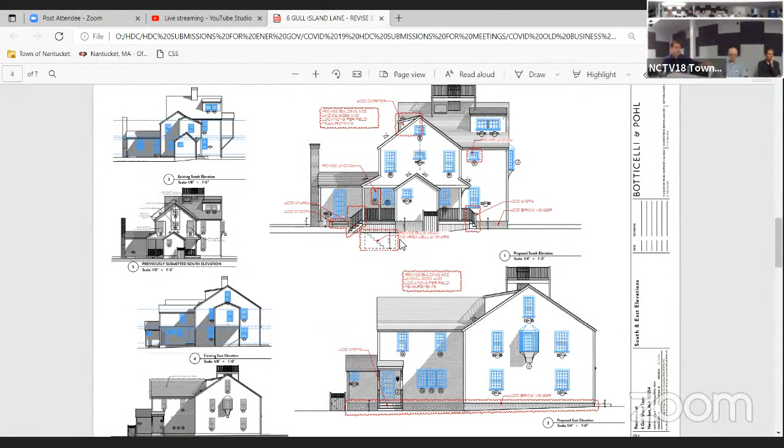All right, and I would have, can I see the lower, what is it? Where the kitchen is, where the four windows that are there now that weren't there before. There were just two windows. I would like perhaps to have just the two windows, not the four windows. What elevation, Diane? I beg your pardon? Which elevation are you talking about? I don't know, oh, they're not giving me all the elevations.

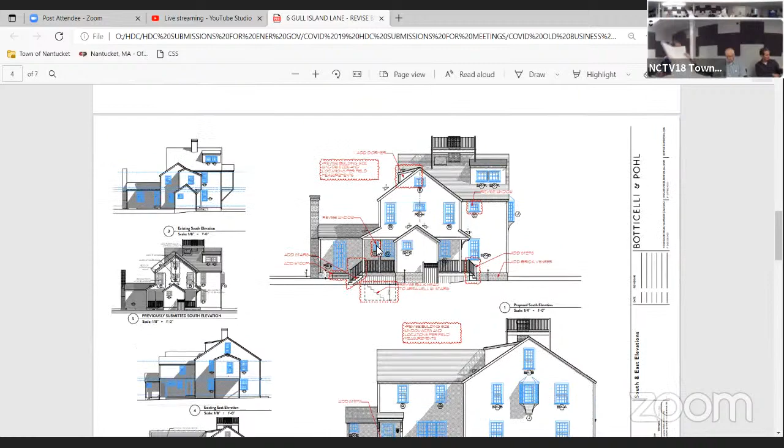I'm sorry I can't be there, but that's the west, is it? On the west, north, you mean? Elevation, west. Yeah, you wanted that to stay as three? It's three, yeah, now and they're just filling in one. It's for, yeah, I would like to have it as three, not to have the whole wall of glass there at that point, that's all. And...

I see why you're adding the dormer. I think that was mainly, and I might feel, with Abby, that at least one window go back where the chimney is, either side of the chimney, but I would like to see the wall there originally. That is original on that wall, is it not, Sarah? It's the 1950s addition, it is.

The two windows that are there were 9/9s to the 1950 infill. It was a screened-in porch originally. Right, well, if it doesn't fit in, I just think it gives strength to the two windows behind the chimney and the wall, so if you could just look at it and see what you think. I appreciate the work because I have been in that building and I know what was there and what you had to find. I'm surprised you didn't find any secret rooms. We did. I think the staircase going down to the basement sort of is good rather than the cap.

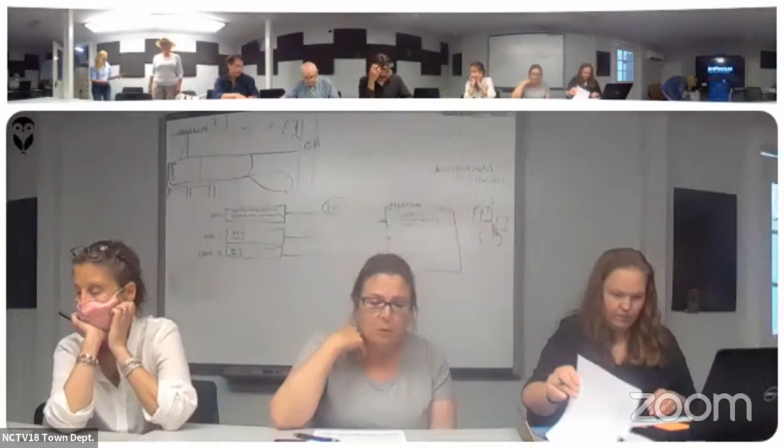Okay, so now Joe, you have number 13, Scannell, 119R Eel Point Road. You sit on it, right? I'm letting Carrie sit on it, so Steve's sitting for Abby.

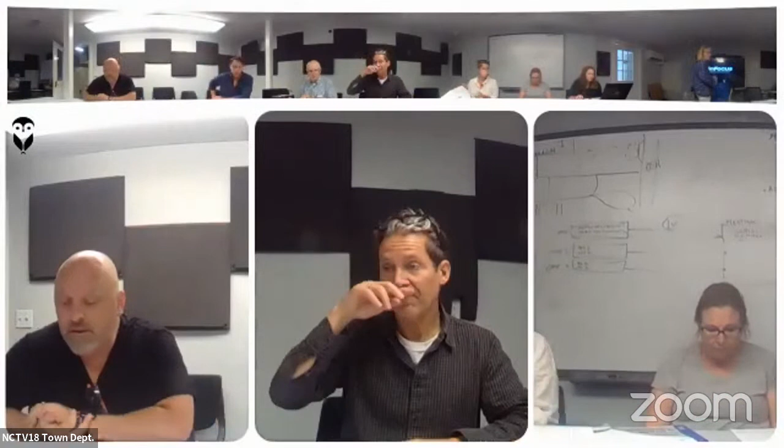And this house is approved, it was approved with a cupola. It's a 9-foot square cupola. My client asked me to bring it to you as a larger cupola. The house is actually framed up to the roof, and there's a hole right now for the cupola. So we could potentially mock up a cupola.

Wow, that would be good. It's too bad you didn't take pictures. Well, we didn't have them mock it up because I knew the meeting was today, but it just occurred to me that I wanted to see where the meeting went. There's a possibility we could mock up what this might look like. The only thing is it doesn't have a porch on the building, and it's a construction site, so it's gonna look... yeah, it's definitely.

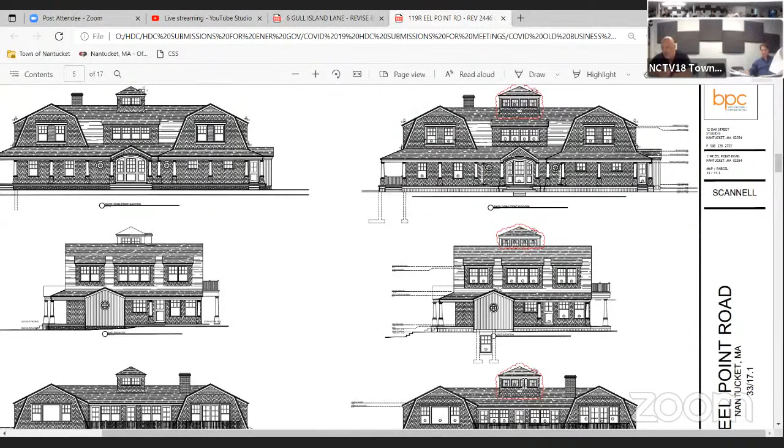Do you want to get a temperature of the board now? Yeah, I'd like to get a temperature of the board. I mean, we went from 2 windows to 4 windows. I think the client asked us to go for this because they would like to have that be an occupiable space versus an 8-foot by 8-foot square on the interior. Right now, this is a 13-foot square that's proposed.

The house is a chunky gambrel, and it felt like it could fly. It's a natural wood roof, and it does have white trim.

Hey, I just have to say, this does beg the question: we have the 30-foot ridge limitation, and roof walks are exempt from that, chimneys are obviously exempt from that. Cupolas heretofore have been exempt from that, but I don't believe we've ever had this challenge of actually having a room in the cupola.

Did you say 16 by 16? It's 13 square, 13 by 13, it's a room. It's smaller than this room, but not much smaller. And so, boy, if I were a building inspector, I'd say, gosh, that's part of the architecture, that's part of the space, and therefore you're above zoning. Just my own little aside.

Sounds like a job for the zoning inspector, actually. There you go, might just say. Okay, so, but in terms of the aesthetics of this thing, how can we get a sense from the board?

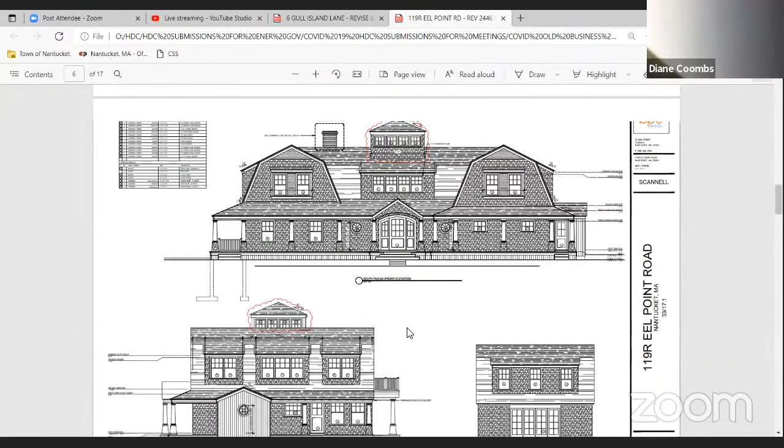I think it would be better without the cupola. And I think the 4-window version is too big because it sticks up higher than a roof walk would be. So I don't know, I'd like to see it with a clean roof and see what it looks like.

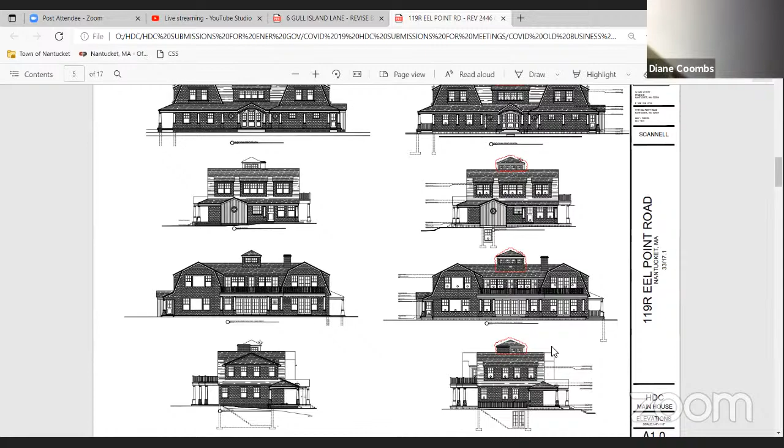On the rear elevation as you've drawn it, the cupola does not sit over the 3 windows below it evenly. It's off kilter, and I don't know why. It's in that elevation, in the middle, and it's off kilter.

But anyway, I'd like to see it clear without anything, and then with the 3 windows.

Okay, yes, thanks Diane, that's correct. Hey Joe, I think the best we could possibly do for you is to see the mock-up with the 3 windows. I think that's as big as it's gonna get. I would check it out with the building inspector or zoning inspector, as Stephen said. I think that's a good suggestion.

How does a mock-up work in terms of timing? You mean with the board? You just let Kathy know, we usually do our viewings on the weekends. You put it up by Friday of that week, call Kathy, say the mock-up's there. She sends out the bulletin to all of us saying the mock-up's there for viewing, and then just take a lot of pictures. Okay?

All right, so can somebody give me a motion on this one? Motion to hold for a view and a mock-up. Okay, that's a great motion. On the motion - oh, and revised drawings. Oh yeah, of course, revised drawings. Thanks Stephen. On the motion, John?

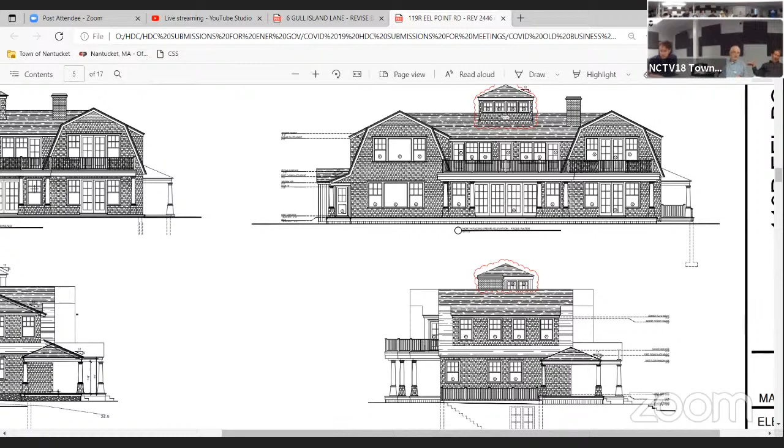I have a comment. Yeah, go ahead. That gentleman just said that everything but the cupola has been approved. Correct, the 4-window cupola. There's a small window already approved. No, I understand what I just heard. My question is this: for the roof pitch, the minimum is 6 and 12, and this is 5 and 12 - that was never caught, apparently. And the other thing is this whole unit with the circle window has already been approved, facing the neighbor, and it's 76 feet long.

I just say, take the height, and if that's all the request is - okay, so he's gonna do a mock-up anyway, but are you in favor of Stephen's motion, John? What's your motion? To revise it to a 3-window so we can look at the drawing, do a mock-up, so we can look at the mock-up. And what was the other part? There's 3 parts: revised drawings, a view, 3 bays.

John, the 2-window cupola is already approved, just to be clear. What? The 2-window cupola is approved currently, just to be clear. Does anybody remember voting for it? Yeah, you did. Apparently somebody did. Okay, that's my question. All right, thank you John.